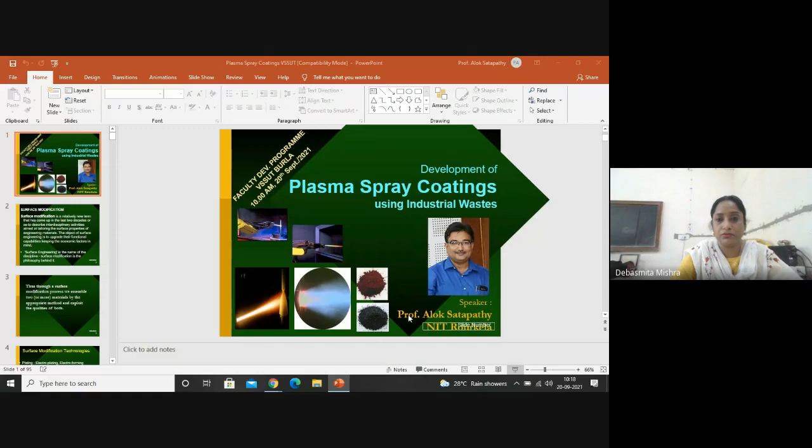Can you hear me? Yes, sir. And can you see the slide? Yes, sir, we can. Acha, just confirm the change of slide. Is it happening? Yes, sir. Okay. Okay, good morning once again. And thank you, Debasmita, for my introduction.

And today, as you have suggested, I will be speaking on plasma spray coatings, and more particularly development of plasma spray coatings using not conventional spray grade materials but using industrial wastes. And these plasma spray coatings are very close to my heart because I was working in this area for many years, and in the process we tried many industrial wastes to convert them from waste to wealth and for value added utilization of these materials into plasma spray coatings.

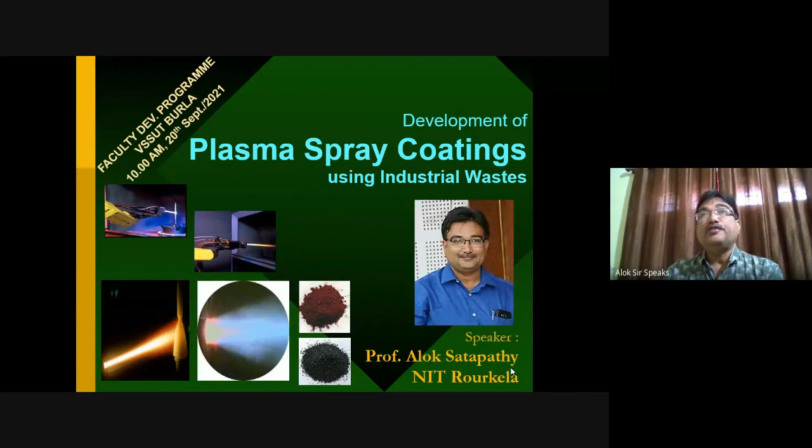So I will start this topic from a word called surface modification. As mechanical engineers, we know that whenever we have a component, the design of the component from the strength point of view is important, and its surface modification is also important from the failure point of view. And what is this surface modification? It is a relatively new term. Actually, it was not there 100 years back. It was there, but not as an organized stream of science and engineering.

It is, therefore, a relatively new term that has come up in the last 2 decades to describe the interdisciplinary activities aimed at tailoring the surface properties of engineering materials. Because in engineering materials, the bulk or core property requirements and the surface property requirements are different. For example, if you want a reflective surface, the surface should be reflective, not the core of the material. So the surface needs to be imparted with some kind of reflectivity by a technique called

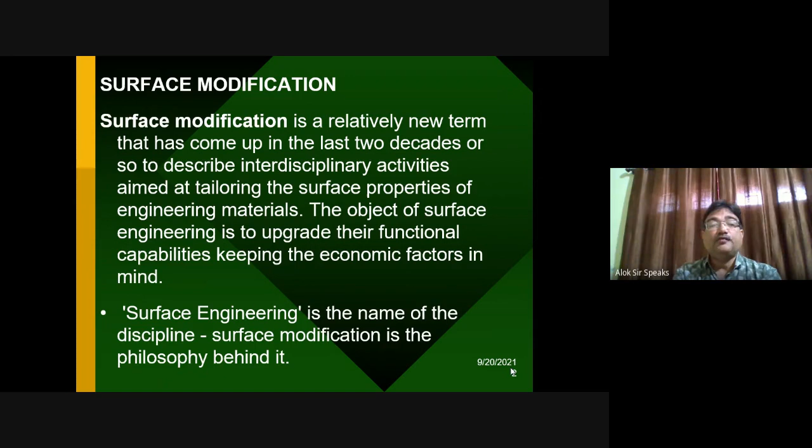surface modification. Now, while surface modification is the philosophy, surface engineering is the name of the discipline. And surface engineering has emerged as a very novel, emerging branch of engineering, where even master's programs and doctoral programs are being floated in many big institutes.

What exactly do we do? Through a surface modification process, we actually assemble 2 or more materials by the appropriate method and exploit the qualities of both: the quality of the core material for the strength or load bearing purpose, and the quality of the surface for combating the attacks of external or operating environments. Now there are different surface modification technologies like plating.

Plating is a very common technique. Electroplating and electroforming are under this plating category. Then you have diffusion processes, in which carburizing, nitriding, chromizing, boriding, all these processes are there, where actually you treat the surface in such a way that these elements get diffused to the surface, but they do not change the dimension of the component.

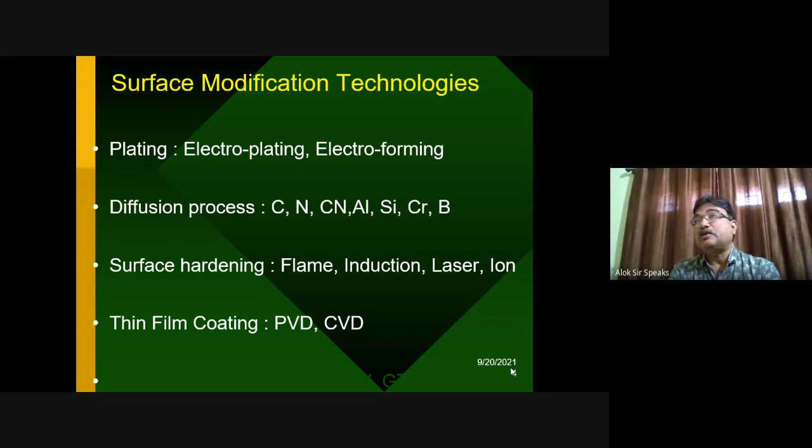But in overlay coatings, where another material is deposited on the original substrate, in that case the dimension does change. Then there are processes like surface hardening and thin film coating, like physical vapor deposition and chemical vapor deposition, under the modern surface modification technologies. Today we shall be discussing mostly coating.

What is a coating? Coating is actually a layer of a different material, which is formed naturally or synthetically or deposited artificially on the surface of an object made of another material. That means you can have a titanium nitride coating on mild steel. Titanium nitride is altogether a different material. Mild steel is another material which the machine is made up of. And on the mild steel surface, you give a layer of external material, that is titanium nitride, with an aim of either obtaining some technical benefits, or you can also use it for decorative purpose.

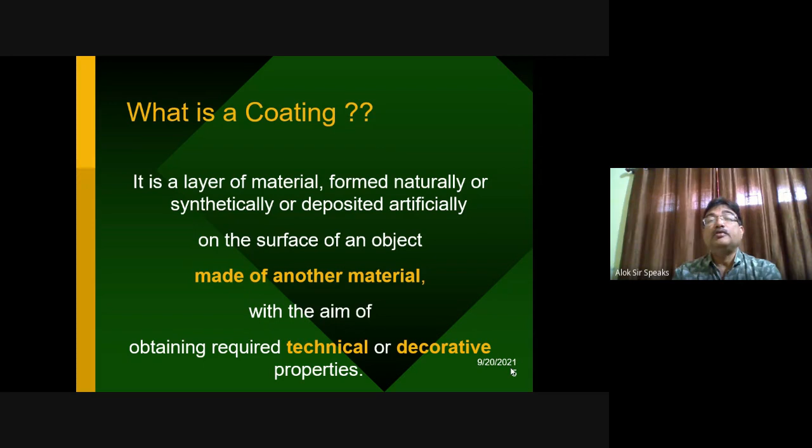So there are 2 members in this activity. One is the substrate, another one is the coating. The substrate is the coated object, and coating is the material that is coated. One is the base material on which coatings are to be deposited, and coating is the external material that is deposited on the base material. Like in composite we have a matrix and a reinforcement, similarly in coating activities we have a substrate and an external material called the coating, which is deposited on the substrate in order to impart or add some required properties onto the main base material.

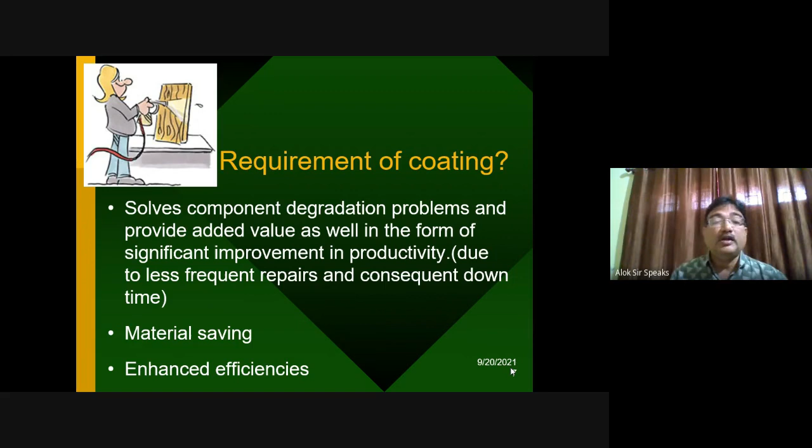So I've already told why the coatings are required. Coatings are required because they solve the component degradation problems. Why does the component degrade? Often because of environmental attacks, because of corrosion, because of coming in contact with dust particles, saline climate, water, or moisture in the air. The coating solves this degradation problem, and thereby coating also helps in material saving and enhances the working efficiency of the component. Once the component degradation is decelerated, naturally the efficiency will be enhanced.

There are different types of coatings. There are decorative coatings. There are some products where the aesthetic is of high importance. For example, ornaments, fancy objects, or a car. You will buy a car provided it looks nice. If your car is looking like a war tank, you will not buy it. So the outer look must be very good, and for that coatings with a decorative purpose are provided onto these products. That is also a subject of technical interest.

Then protective coatings. Protective coatings are technical coatings provided on the surface of any base material whose task is exclusively to protect the main component from the harmful effect of the environment, mainly the atmosphere and chemicals, as well as from mechanical hazards. Mechanical hazards means if there is wear and friction, high pressure, or high temperature in a workplace where the component is put to use, the surface may get degraded because of these external factors, and there you require a protective coating.

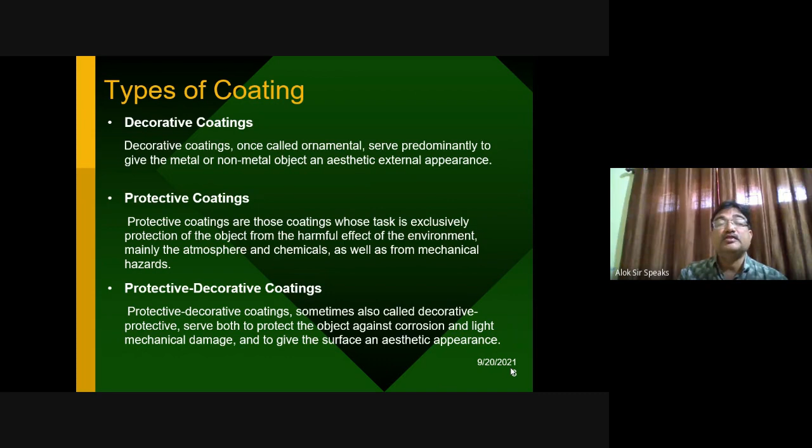For example, suppose you are using pipes in the deep sea. They come in contact with saline water, so very soon the surface will be degraded. So the appropriate coating material must be deposited on these pipes and tubes so that their longevity is enhanced and their performance is bettered. So there can be decorative coatings, protective coatings, and also protective decorative coatings, where the purpose is not only to protect from mechanical and environmental hazards, but also to give a good appearance, so that its market value is increased.

The protective coating is also a technical coating. Technical coatings are coatings provided on a base material with an intention to get some technical benefit. So you can have coatings that improve the tribological properties, that means they arrest the damages due to wear and tear and friction. There are coatings which enhance electrical properties. Sometimes you can coat a material with an electrically conductive or electrically insulative material so that the surface becomes conductive or insulative accordingly.

Then coatings which enhance the solderability, the ability to get soldered. The coatings that protect the material against diffusion. The coatings that enhance some target thermophysical properties. Then coatings which enhance the optical properties. Suppose you want a coating to absorb the light or absorb heat, then in that case you can paint it black, so that a black coating is provided on the surface.

Sometimes you want reflectivity on the material, so in that case you can apply a reflective coating so that you can get a benefit out of that. For example, when you are driving on a highway, you can see the road markers. The road markers are reflective materials, so that even while driving, you can see the border of the road or the divider from a distance. So there the reflectivity plays a very important role.

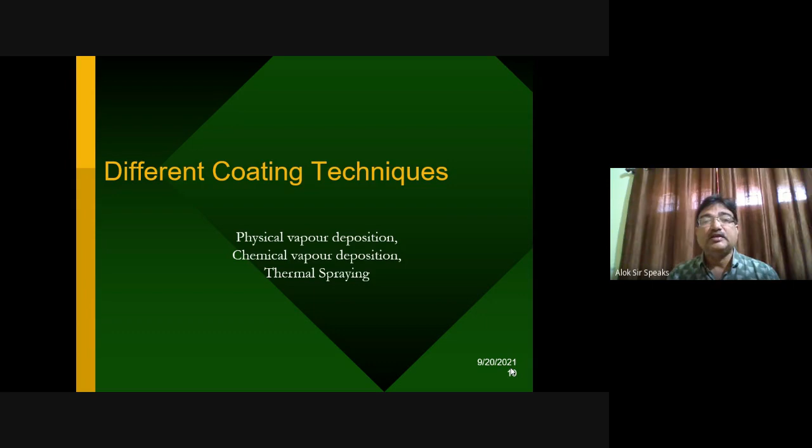Today our discussion will be confined to a particular type of thermal spraying technique. So we must understand what thermal spraying in general is, and then we can go for the specific one, that is plasma spraying. Now, what is thermal spraying? Thermal spraying is an umbrella. There is nothing like a single thermal spraying technique. It is actually a category of spraying techniques under which there are many processes.

So it is a generic category of material processing techniques that apply consumables, because the consumables are the ones which are to be deposited, spray coated on the base material. This consumable must be in the form of finely divided molten or semi-molten droplets to produce a coating onto the substrate kept in front of the impinging jet.

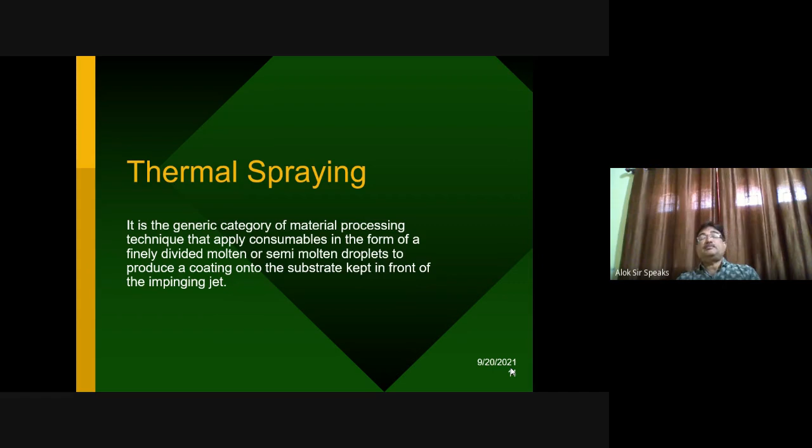So this sentence indicates that thermal spraying covers a host of techniques that involve use of consumables, or the coating materials, and they are to be melted or semi-melted. That means you require a heat source for that, and then you have to have an impinging jet, which will carry these powders to the target surface.

Now before we see what actually is thermal spraying, let us have a visit to the various applications that use thermal spraying, and you'll be surprised and amazed to see that there is no industry untouched by the use of thermal sprayed or coated products. So the applications are repair or build-up of worn or damaged surfaces.

Suppose a surface is damaged, then you can reclaim it, or make the damage up by the thermal spray coating technique. You can undercoat for paint, you can do it for electrical conductance, you can do this coating for improving wear resistance and corrosion resistance. You can make this coating to make products resistant in high temperature situations, and you can also make them insulative at the surface, as I told before, in case the working requirement demands it.

As I told you, thermal spraying is not a single technique, it is a common name for a vast gallery of techniques for coating deposition. In this technique, the coating is produced by a process in which molten or softened particles are applied by impact onto a substrate, and that impact is accomplished by an impinging jet.

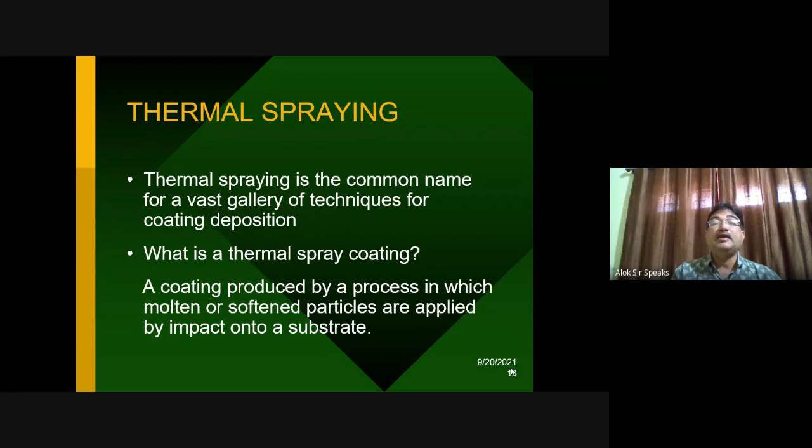We must understand at this place what are the fundamentals of this thermal spraying process, how actually it occurs, and what are the various stages. And it is very simple to understand.

It's very simple. It is just like if you take in your hand a ball made of mud, and if you throw it to a wall, then what will happen? So if the mud is a wet mud ball, then in that case what will happen? A part of that may stick to the wall, or the whole of it may stick to the wall, or the entire ball may fall onto the ground after hitting the wall, and even after that it will form an impression on the wall. So it will form an impression on the wall that one can make out that something has been thrown to the wall.

Similarly, exactly the same way, the thermal spraying technique is carried out. The different steps are as follows. The coating material, I mean, whatever you want to coat, say, as I gave you the example of mild steel and titanium nitride. Titanium nitride is the coating material, mild steel is the target material or base material on which the titanium nitride coatings are to be deposited. So the coating material is molten by the heat source and propelled towards the surface that is being coated, where they impact, flatten, and solidify.

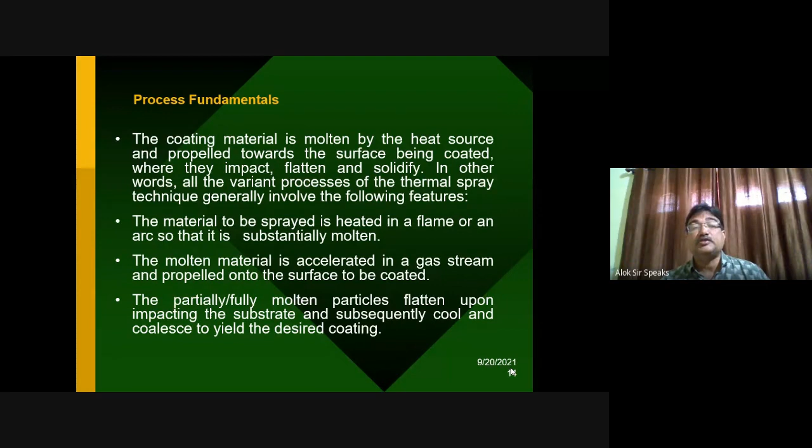This molten material is accelerated in a gas stream, so you require a gas, precisely a high pressure gas stream, which will carry this molten particle in a direction where you are placing the target object, and that should be propelled onto the surface which is to be coated. And these partially or fully molten particles flatten, as I was giving you the example of this ball made up of mud hitting the wall. So these partially or fully molten particles flatten upon impacting the substrate and subsequently cool and coalesce to yield the desired coating.

You can look at this diagram. So these are the process fundamentals. First, you can have the coating material in the form of a rod or a wire or powder, and that powder will be subjected to supply of certain amount of heat, and that amount of heat must be capable of not only taking it to the melting point, but also should be providing the latent heat of fusion, so that the particles melt and they get into a molten state, and then they come in contact with a high pressure jet, made up of compressed gas, high pressure gas, or stream, and then it will be propelled towards the surface.

This is the surface. You can see the hatched line is the surface or the target surface on which coatings are deposited, and the formation of splats are there, and these splats do get formed layer after layer on the substrate surface, and after some time you will see that there is a multi-layer coating formation. You can see the developments precisely in this magnified diagram. The material coming to the molten state, getting accelerated and propelled towards the target surface, hits the surface, forms a splat, and then a number of splats one after another is formed, and so after some time a coating of reasonable thickness is formed by these splats.

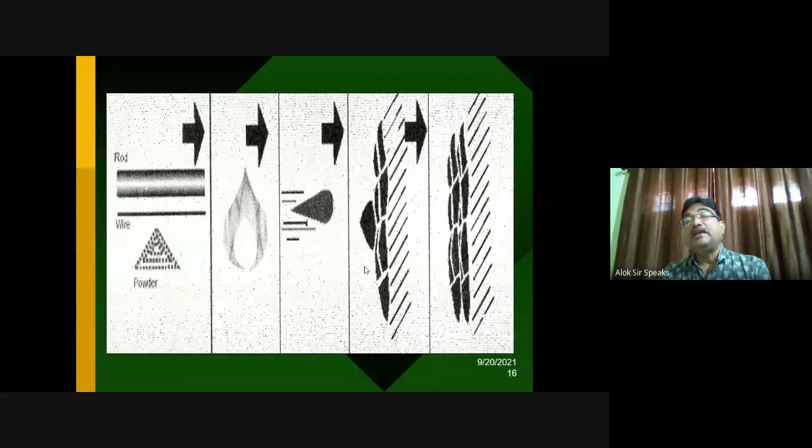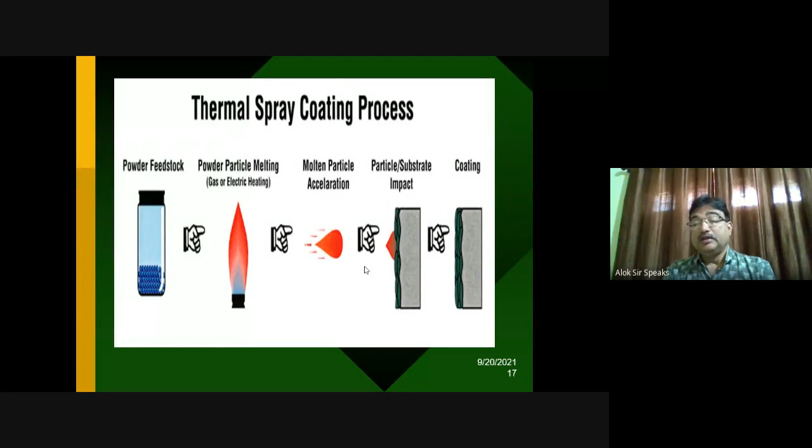The same thing: the feedstock powder particle melting, molten particle acceleration, then particle impact, and then finally you have the full coating body deposited on the material body, base material. These are schematics. So today I'll be showing you a lot of photographs which will give you an insight and idea about the coating formation.

And we know why I'm telling spherical particles, because you know that when anything is melted, when it becomes a liquid, then it will take the spherical shape due to a physical property called surface tension. All of us know it from physics.

And then, as I told you, the melting of these consumables or the coating materials may be accomplished in a number of ways. The consumables can be introduced into the heat source either in a wire form or in a rod form or in a powder form. And what can be sprayed? These consumables can be metallic materials, ceramic materials, or even polymeric substances.

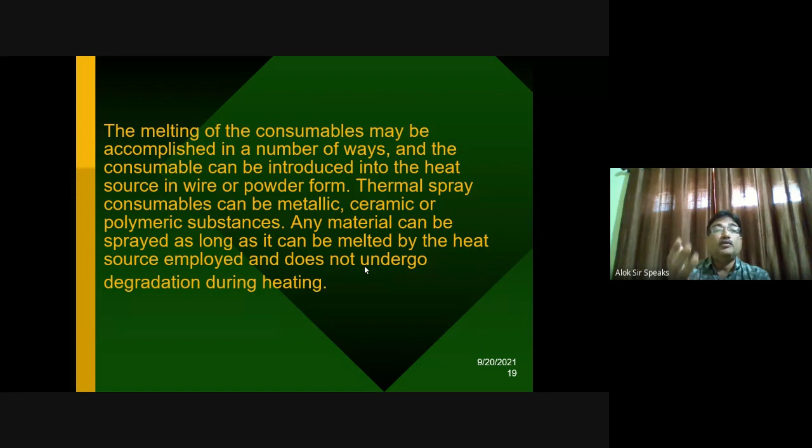So any material can be sprayed as long as it can be melted by the heat source employed and does not undergo degradation during heating. So it should not undergo a large scale degradation during heating, and it can be melted with the absorption of heat, then it can be sprayed. So as I told you, look at the versatility of the process. It can be metallic material, it can be ceramic material, and it can be polymeric substances. Today we will be discussing mostly about the ceramic coating formation.

And there are two basic ways of generating heat. How do you generate heat? Okay, a heat source is required, agreed, but where does the heat come from? And depending on where the heat comes from, you have different types of thermal spray techniques. Like today we'll discuss the plasma spray technique. It is because the heat source is plasma. Plasma provides the required heat for melting of the material. That's why it's called plasma spraying.

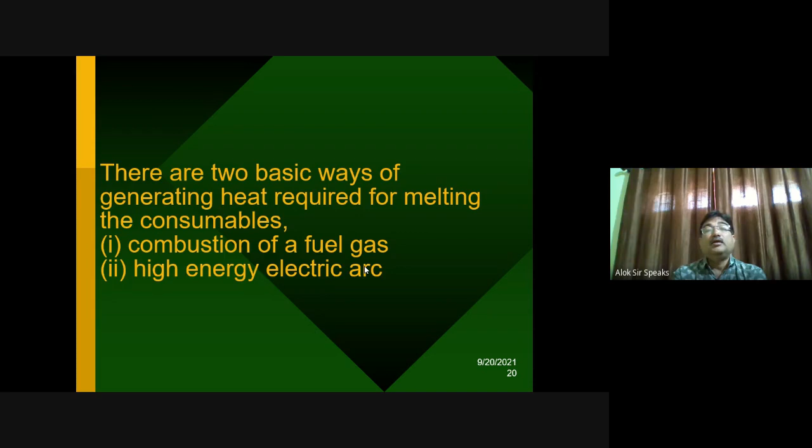Otherwise, it is a thermal spraying technique. If it is coming from an arc, it is arc spraying. If it's coming from a flame, it is flame spraying, like that. So the heat source can be obtained by combustion of a fuel gas or by a high energy electric arc.

We are coming to the process, but as I assured you a few slides back, we must have a look at the possible uses or applications of thermal spray coatings, and you can see the list of industries that employ thermal spray coatings. And look at this host of industries, and you will find there is no industry untouched. Even if you name some other industry other than this, that also will be using thermal spray coating.

So you have aerospace, construction industries, electronics industries, defense, automotive, biomedical sectors, dredging and food processing, marine and mining, petrochemicals, steel plants, textile and power plants, pulp and paper, oil and gas units. So everywhere you will find rampant use of thermal spray coatings.

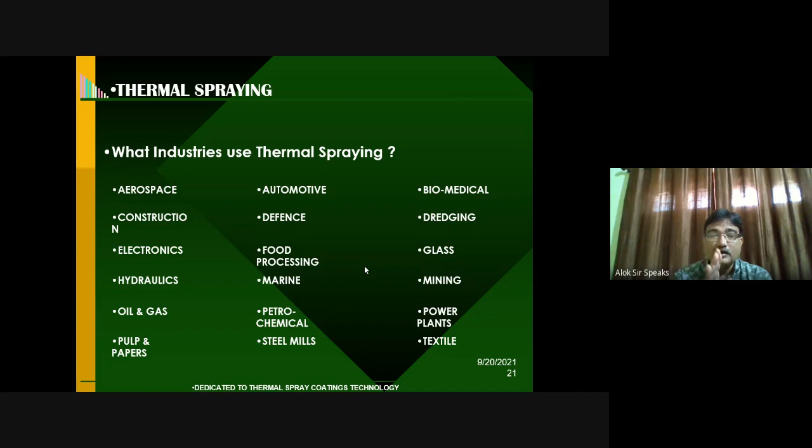So thermal spray coating, the technique may not be a novel technique, but it is not a novel material as such, because the conventional thermal spray coating materials are being used everywhere universally. What is novel about the thermal spray technique is that you have to explore new materials, what can be coated, then that will give some novelty to your work.

Now look at the aerospace industries, and there you use coated components because of their strong corrosion resistance, high temperature resistance, and you normally use thick coatings. They require sufficient coating adhesion, I'll tell what coating adhesion is, then abrasion resistance, etc.

And you can see on the right bottom, these are the specific parts. So instead of just telling that it is used in aerospace industries, we can also list the specific components, I mean, pinpoint the applications of these thermal spray coatings in the aerospace industries. So look at the turbine blades, the piping system, okay, and the journals, the bearings, and in all of them thermal spray coatings are being used.

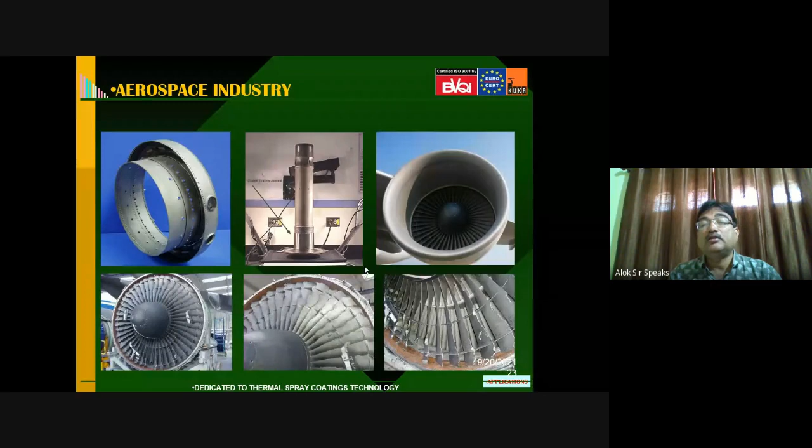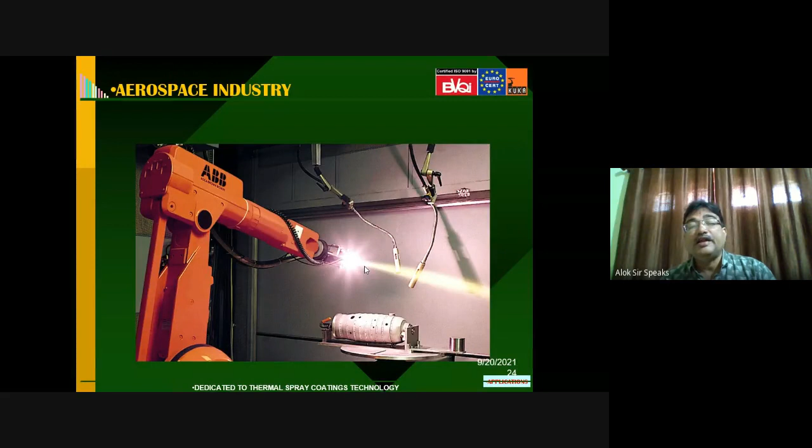This is how a coating process is accomplished. If possible, I will show a video where you will get an idea about how the coating takes place. And this is also part of an aerospace turbine unit, the opened one. So here also the blades are coated with thermal spray coating.

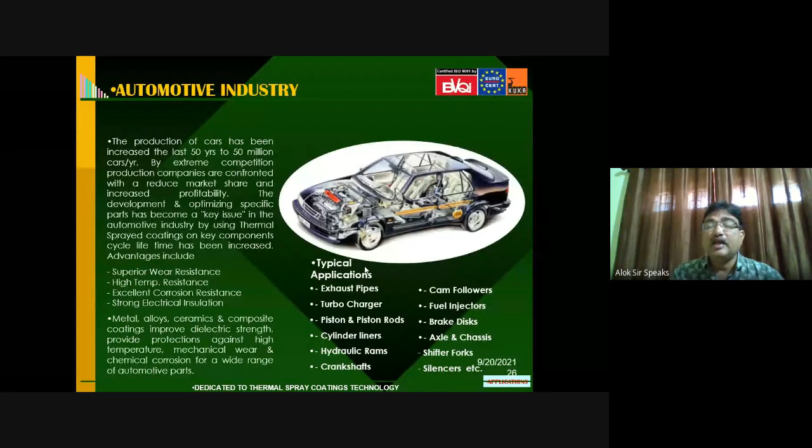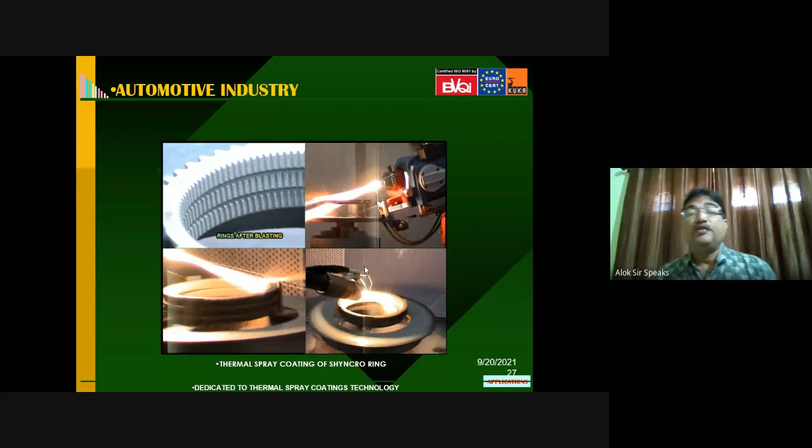In the automotive industries, there are many parts: exhaust pipes, turbochargers, piston rods, brake discs, axles, shift forks, silencers, crankshafts, hydraulic rams. Everywhere thermal spray coatings are being used. So the list is very long, and just see the photographs of the different parts of an automotive, how they are coated, and these are pictures picked up from industries where different parts like the cylinders, the silencer system, the exhaust system, all these things are being coated both internally and externally.

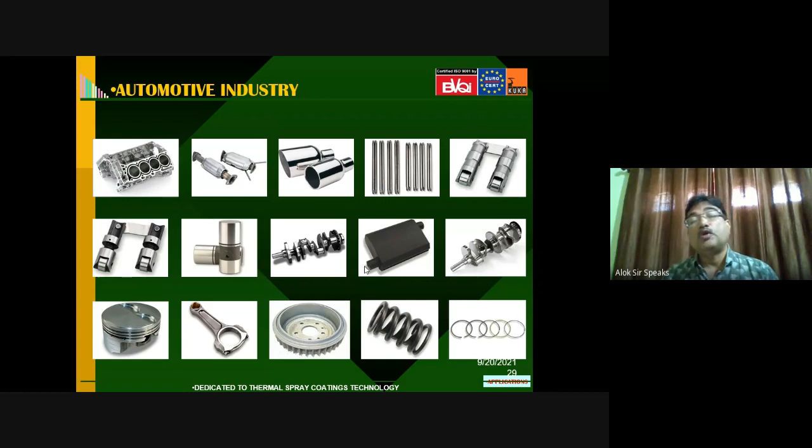These are the different parts, the coated parts or finished products. Of course, the coating material that is coated on these substrates or components will be different depending on the demand of the application. Coming to the biomedical industry, these coatings do have a lot of applications, particularly in artificial limbs and bone and hip joint replacements.

But here, apart from strength and durability, the additional and most important required property is biocompatibility, because it is to be implanted inside the human body. So it has to be compatible with the other parts of the body, the blood and the flesh and nerve system. So the biocompatibility needs to be checked.

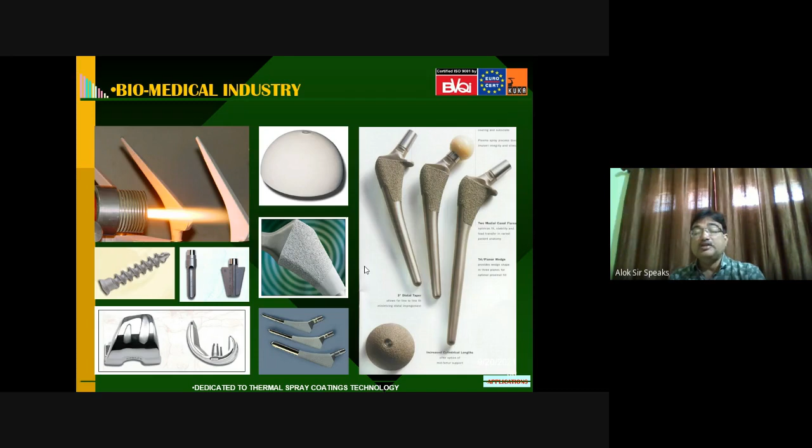Civil and construction industries, no need to mention the applications. Anywhere and everywhere you see, you will find thermal spray coated samples. Power plant industries, starting from turbines, cyclones, boiler tubes, shafts, rotors, turbine rods, pumps, everywhere you will get a signature of this thermal spray coating.

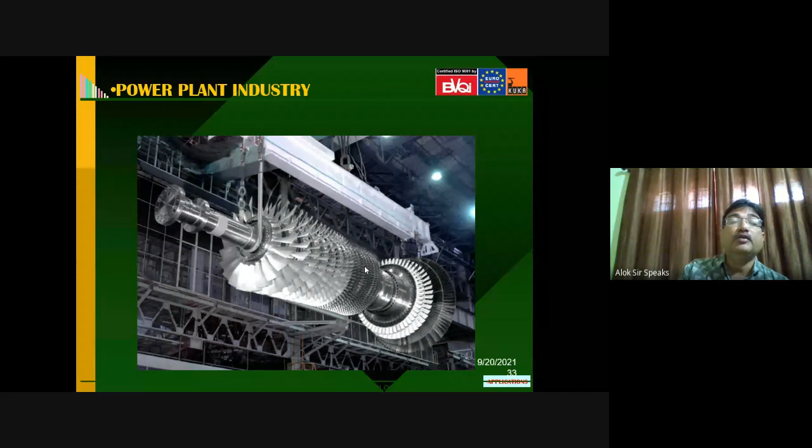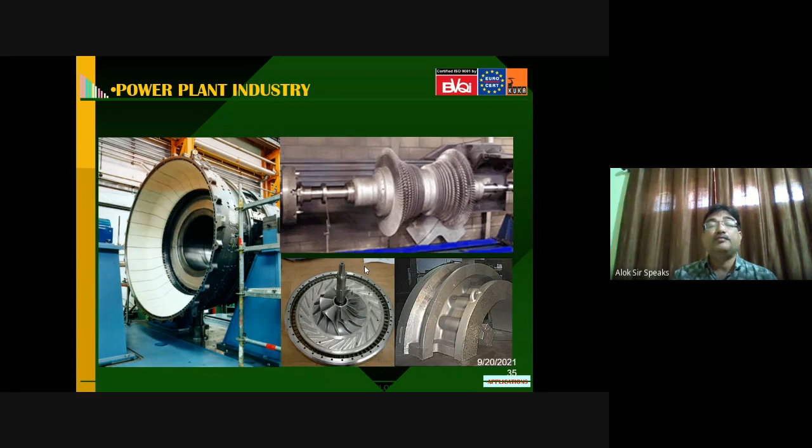Now, as I told, the power plant where you have this rotor system, turbine system, there the use of thermal spray coatings is very large. These are the different parts, finished products after being coated, and you can see the coated surface, and you can see that these surfaces possess properties that are different from the properties of the material that they are made up of. That's the difference, and that's the beauty of surface engineering.

The coated material or the coated surface will exhibit fairly different properties compared to the intrinsic properties of the base material. And these properties of the outer surface are the required properties for the component, because it is the surface which will be coming in contact with the direct environment, the immediate environment. So we saw a gallery of thermal spray applications.

Let us discuss what are the benefits of this thermal spray. Benefits: this coating can be adapted to specific criteria. A comprehensive choice of coating materials can be made. Coatings can be post-treated after being coated. Thick coatings can be applied at high deposition rates. Parts can be rebuilt quickly and at low cost, usually at a fraction of the price of the replacement.

That means if you are going to reclaim a part and make up for the damage of the part due to wear and tear using thermal spray, then that will be a costly activity, no doubt, but that cost will be still less than the cost of replacement. So components with a coating will have longer lifetime, it is obvious. Their durability and the lifespan will be more.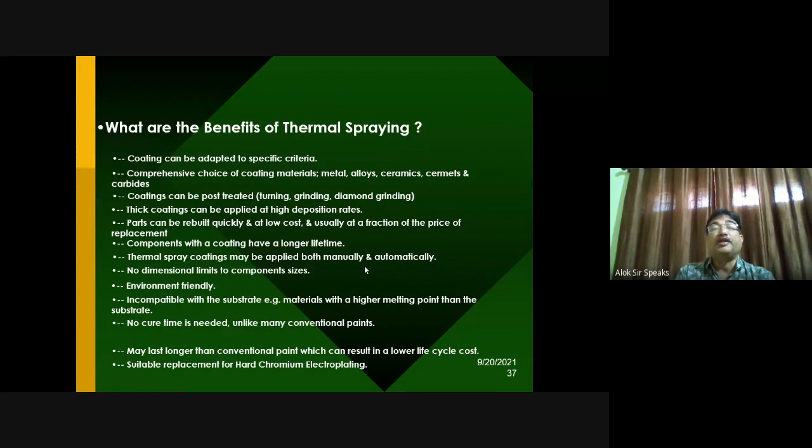So once you have identified a coating material which is cheaper than chromium, then this activity will be less costly than to have a replacement for hard chromium electroplating. So these are good things about thermal spray technique. There are limitations though, but this thermal spray process, as I told you, till now we have not gone to plasma. We are only discussing thermal spray in general.

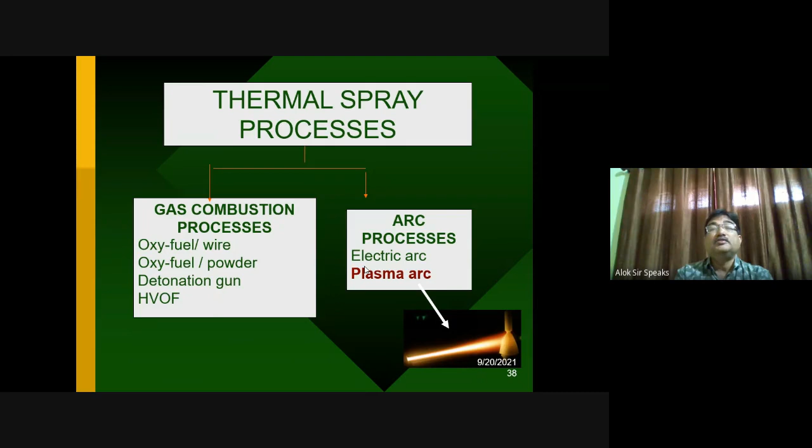I think in the next session, Dr. Mantri will highlight more on this, because he'll be talking about thermal barrier coatings. So there, I think he will cover all these things as well.

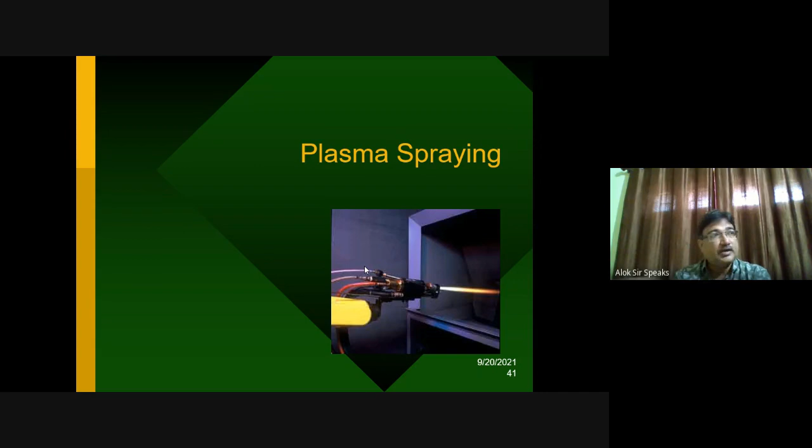So let us come down to plasma spraying. What is plasma spraying? Plasma spraying is a thermal spraying technique which uses plasma as the source for heat in order to melt the coating material. Otherwise, the rest of the process fundamentals, everything is the same as for thermal spraying, because after all, it is a thermal spraying technique.

Now, what is plasma? Plasma, as we know, is the fourth state of matter, and is distinct from solid, liquid, and gaseous state. When you heat a solid, you get liquid. When you heat a liquid, you get gaseous state. Similarly, when you heat a gas, then what happens? The gas will get dissociated from molecules to atoms, and get ionized from atoms to ions, and then you get a cloud of positively and negatively charged particles, the ions, the molecules, and the atoms.

And that cloud, which is quasi-neutral in nature, although it contains charged species, but as a whole it is quasi-neutral, and that cloud is called plasma. And it is an electrically conducting medium, and at the same time, though it is an ionized state of gas, it is not called or categorized as the gaseous state, because plasma does not follow the gas law. Conventional gas law, the Charles law, Boyle's law, universal law, etc., are not followed by plasma.

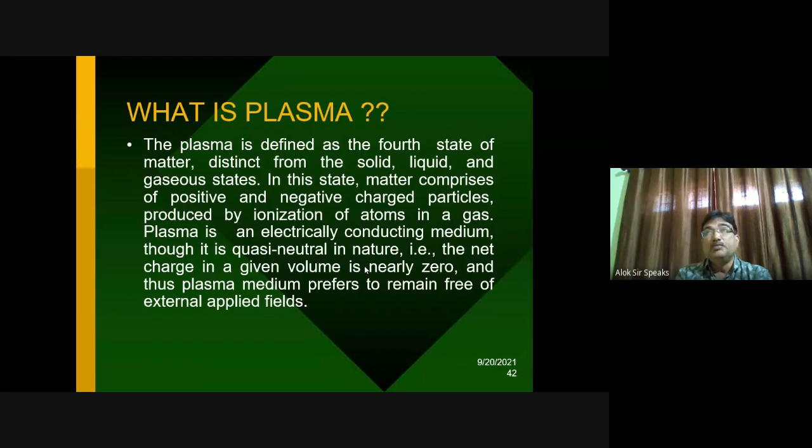Plasma behaves differently, and it is considered not as a gas, but as a state beyond the gaseous state, that is the fourth state of matter. This is what I was telling. Solid to liquid, liquid to gas, and then further application of it will give rise to the generation of plasma. And it is the fourth state of matter. Plasma we can see in the lightning, on the sun's surface, and within an electric bulb the plasma cloud can be visualized.

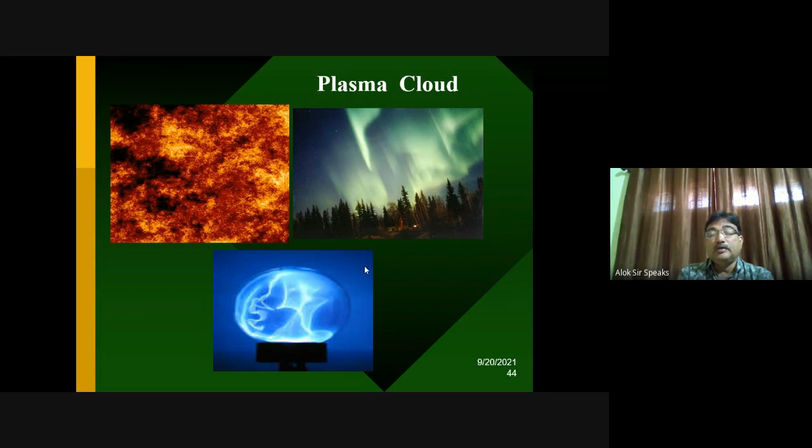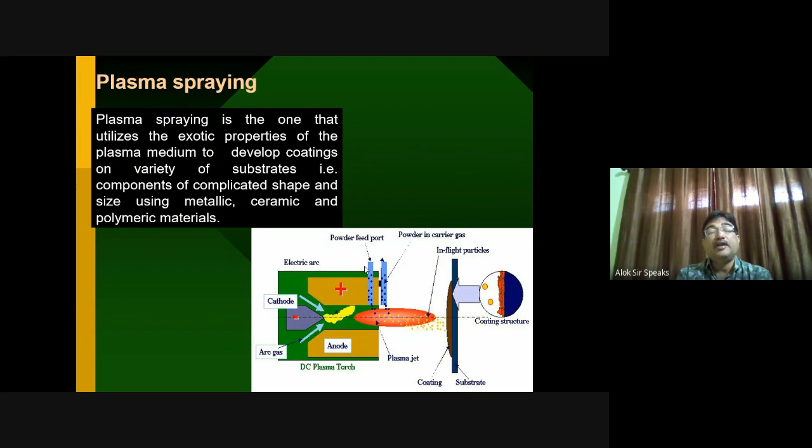This plasma spraying is one thermal spraying technique, one typical and very widely used thermal spraying technique that utilizes the exotic properties of the plasma medium. Plasma medium has got its own beautiful properties, and very conducive for industrial applications, and that is utilized to develop coatings on a variety of substrates of complicated shape and size, and it can use also a wide range of materials ranging from metallic to polymeric ones.

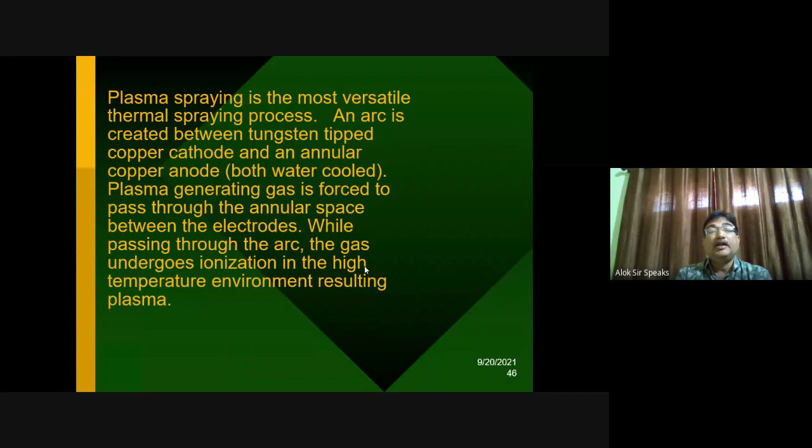So I repeat that plasma spraying is the most versatile thermal spraying process. I have already told before. And what happens here is that an arc is created between the tungsten tipped copper cathode and an annular copper anode, and both are water cooled, and this plasma generating gas is forced to pass through the annular space between the electrodes. While passing through this arc, the gas undergoes ionization. Because of the high heat, high temperature, it gets ionized, and that results in formation of plasma.

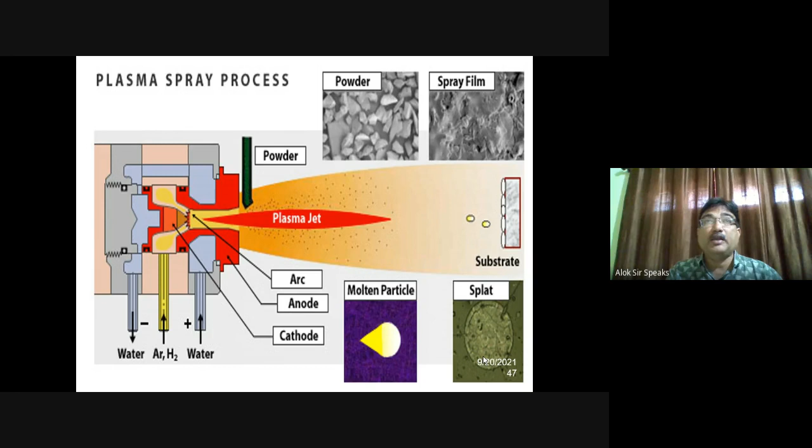So one particle will form one splat, and the particles are continuously hitting the target. So therefore, there will be continuous formation of splats, and all these splats layer by layer together will form the coating body ultimately. So this is again the description of the same thing that I have spelled out, and the different steps.

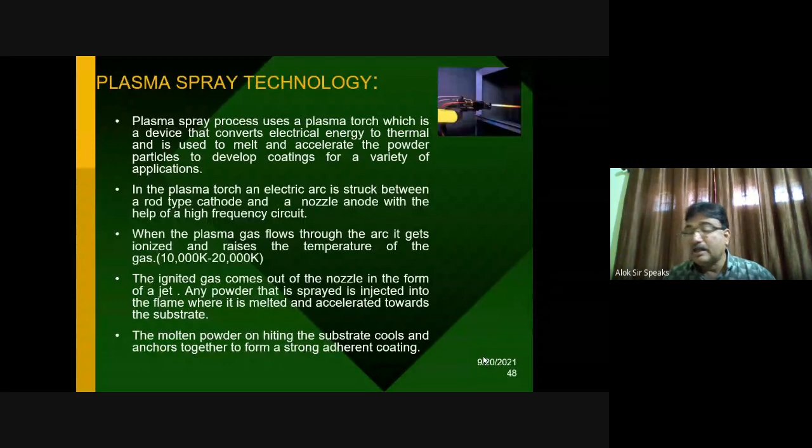And here I would like to tell that the maximum temperature that can be achieved is very large. It is beyond 10,000 K, and sometimes for some gases it also reaches 20,000 K at very high torch input power. That means when the current and voltage combination is made high, then the power input to the plasma torch becomes even higher, and then you can reach a temperature as high as 20,000 K. And the beauty is that at this temperature, any material can be melted, and that is the advantage of plasma spray process.

So, if you list the plasma spray process advantages, then any powder which melts without sublimation. Okay, the condition is that it must be melting, but at the same time should not sublimate. Sublimation is the process of going directly to the vapor phase, bypassing the liquid phase. So that should not happen. It should only melt. So powder which melts without sublimation can be coated.

The substrate temperature, although the flame temperature is as high as 10,000 K, will not increase, because the flame does not come in physical contact with the substrate. So it remains at a distance called the TBD, torch to base distance, and the substrate temperature can at best go a little beyond the atmospheric temperature, up to 50 degrees centigrade, because the environment gets heated up. There is no restriction on the size and shape of the job.

That's the versatility of this process. And the coating process is fast. That's a very unique advantage or merit of this plasma spray coating process, because the coating process is very fast.

In seconds or in minutes you can finish coating of even 1 square meter of a component, and the thickness can go from few tens of microns to millimeters. That means this technique is suitable for thick coatings. In the coating world, any coating which has got thickness over say 50 micron or 100 micron are called thick coatings, and below 10 micron are called thin coatings. So for thick coatings, this process is applicable. This process is not applicable for thin coating requirement.

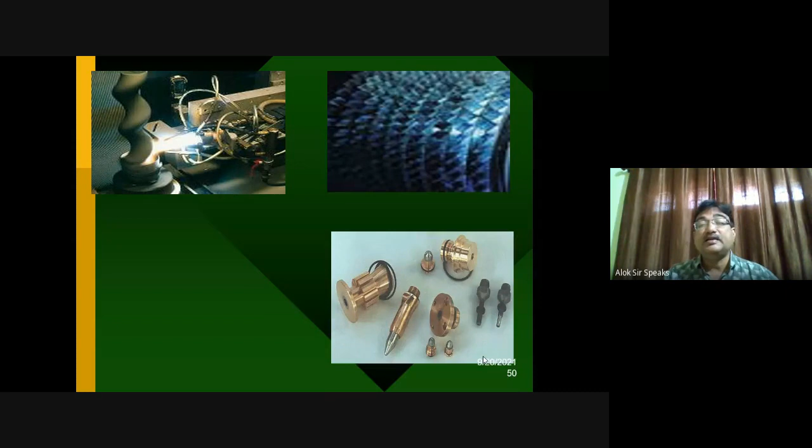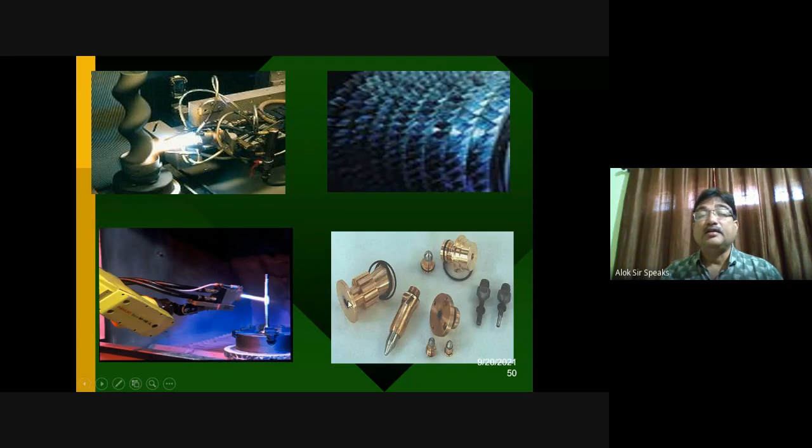You can see that complicated shapes and intricate shape and size of components can also be put to use for plasma spraying activity. So that is the versatility of this process. Even a curved shape like this one, or internal shapes like inside of a hollow tube, all these things can be done with plasma spray.

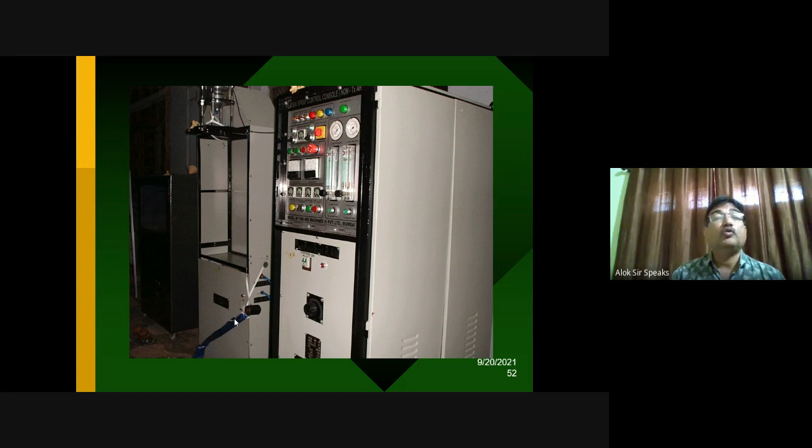This is a typical plasma spray setup where you have the different units like powder feeder, the control console, and the plasma gun, then the cathode anode combination, the water cooling system, and gas cylinders from which plasmagen gas is supplied. All these things you can have. This is a picture of a plasma spray coating facility which was there at NIT Rourkela. Right now it is not there, and we are looking for a more advanced and automated system now.

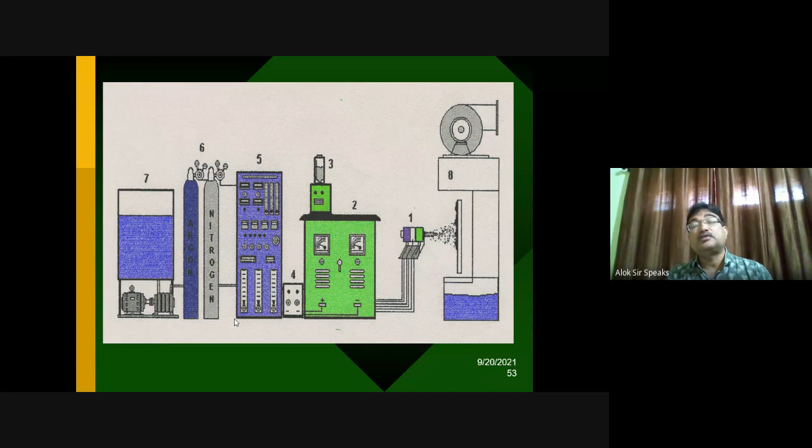This is the schematic of the same setup, where you have the gas cylinders, the control console, the electrical power system, then you have the plasma torch, then you have external powder feeder from which the powder is fed to the flame. Schematic diagram of a complete atmospheric plasma spray setup is this. Why am I calling it atmospheric plasma? Because this activity takes place under atmospheric conditions, not in a controlled condition. If it is conducted in a controlled condition, then we say it is controlled atmosphere plasma.

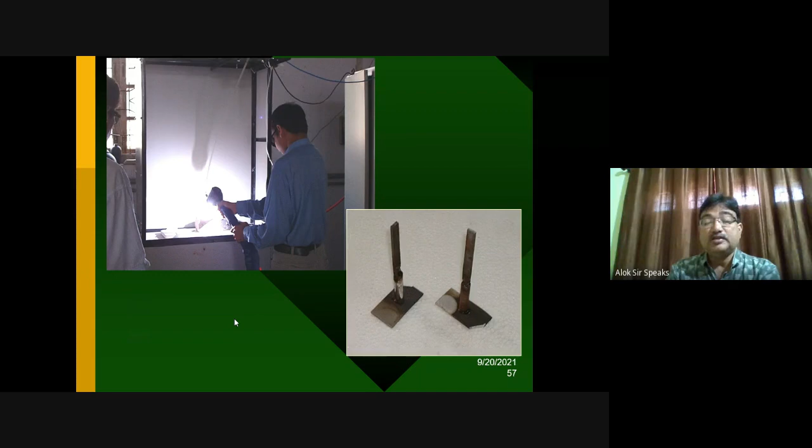Then this is an old picture of mine at BARC, where the plasma spray coating was done by me manually. Now there are automated systems where you can control it from outside the chamber, and automatically it will do. But here manually you can control the number of passes, the thickness, and also vary the spray distances at your end. This picture I have already shown you, and these are some of our students. They did coating. Even Dr. Mantry, who will be speaking in the next session, prepared his coated samples here at NIT Rourkela in this facility long back in 2004 or 5.

And that was working well, although it is an indigenous setup and a manual system. It is less expensive. But the control in a manual system depends very much on the skill of the person who is coating it. So it is a skill based technique if you are doing it manually. If it is an automated system, you can program the whole thing: the number of passes, the powder feed rate, the temperature, and then accordingly it will operate.

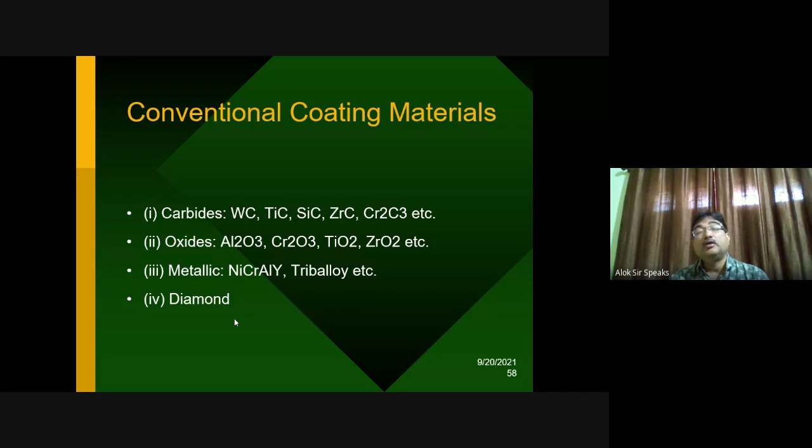Once you conduct a plasma spray activity with this conventional material, normally you have to go for characterization of the coating. The coating characterization involves evaluation of certain essential properties like coating adhesion strength. That means with what force it adheres to the substrate, what is the intensity of mechanical interlocking between the coating material and the substrate. An idea about that is obtained from the evaluation of coating adhesion strength.

Then measurement of porosity is also important, and it is done with an image analysis technique, and that gives you an idea about what is the void fraction of volume that lies within the splats, which is detrimental to the strength of the composite.

It's not desirable in many applications, but the measurement of that void fraction is essential, because that only will tell you what is the quality of the coating, what kind of coating it is. It's a good coating or a bad coating.

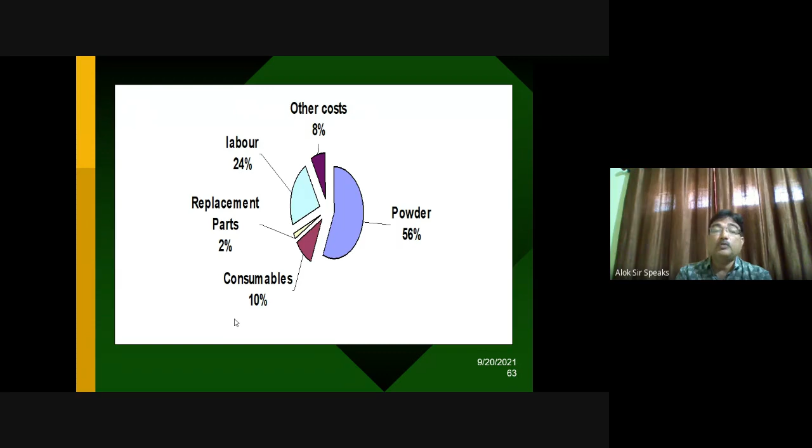Because gradually we are coming to industrial waste, I'm telling you that in a coating activity there are different components of cost expenses. But the major component is the cost of the powder. So in a coating activity, 50 to 56% cost goes to the cost of the powder. That's why the coating becomes an expensive activity.

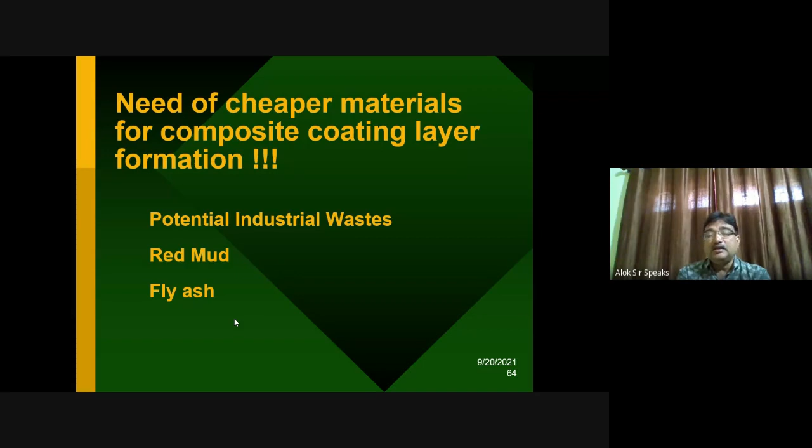Now if you want to make it cheaper, less expensive and affordable by everyone, then you have to focus on that component which is costing more, that is the powder. So the spray grade powders or the conventional powders which I had earlier listed out are expensive powders, and in place of them, if one can think of low grade minerals or industry wastes or construction waste which can have coating potential, then drastically the cost of the coating activity will decrease.

With this in mind, we started our research with some industrial wastes, and we got very promising results, and that research is still going on, and we are exploring new industrial wastes. Recently we are successful in developing the marble dust coating on metallic substrates, not using plasma spray. We are using another technique called high velocity oxyfuel, and my students are involved there, and with the technical guidance from Dr. Sisir Mantri, we are carrying out that coating operation, and we have been successful to a large extent.

So if you look at this combination of materials, you'll find that except the alumina titania, all the other combinations do contain some industrial waste. Either both of them are industrial waste, or at least one of them is. So these coatings have already been developed by our group, and I will share my experience with at least one or two such coatings. First one is red mud fly ash coating.

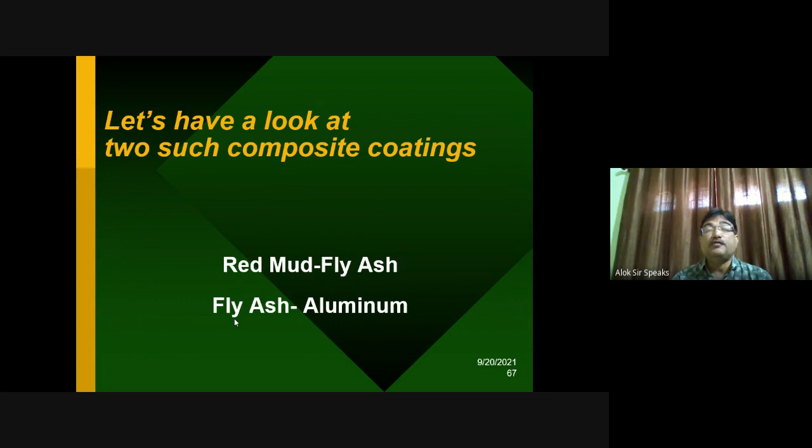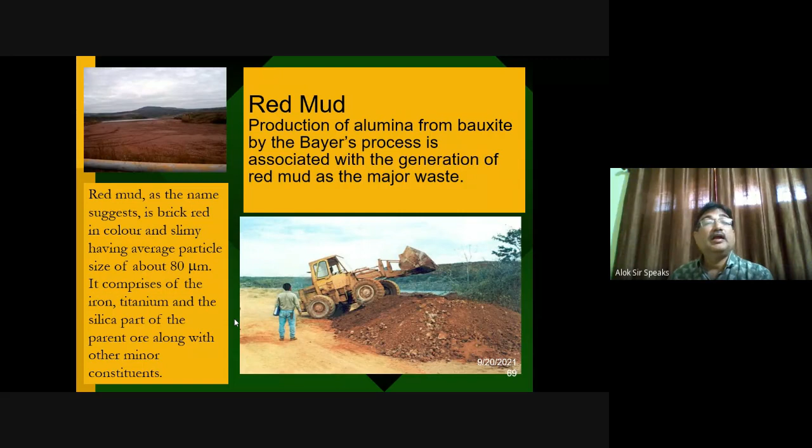So red mud, as you know, is a waste that is generated in the alumina plants, where alumina is produced from bauxite through Bayer's process. And in Odisha, a big company is there, Nalco, and they have an alumina plant at Damanjodi. So we collected some red mud from Damanjodi. You can see the picture here, and this is looking red because of its high content of iron oxide,

and this is a huge waste, and the disposal of this waste is a big problem for the alumina industries throughout the globe. Although Bayer's process is 150 years old, still the disposal and utilization of red mud remains a challenge to engineers and the scientific community throughout the globe. Either this red mud is dumped into the sea, provided the sea is nearby, or it is simply dumped into open space. When it is dumped into open space, being carcinogenic, it creates health hazards in the immediate vicinity. The inhabitants who are staying nearby are affected.

Their health is getting affected, and it is a known pollutant. But if it can be used for some value-added applications like composite making or coating making, then maybe a part of that can be properly utilized in order to make some value-added product.

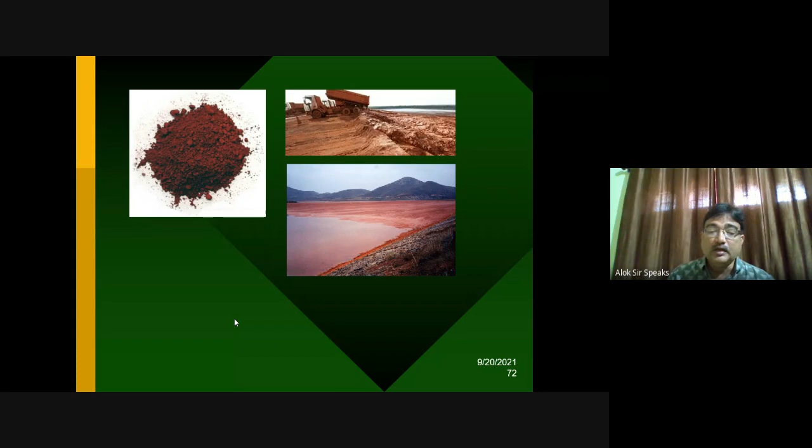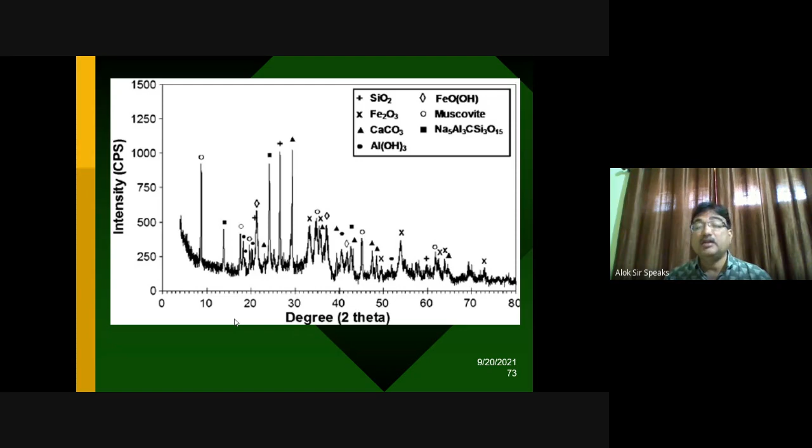Keeping this in mind, we tried this red mud coating, and we went for an X-ray diffraction test of the red mud. We found different constituents like silica, iron oxide, calcium carbonate, and a little bit of aluminum hydroxide as well. Then we sieved it to get a particle size in a range of say 80 to 100 micron, around that range.

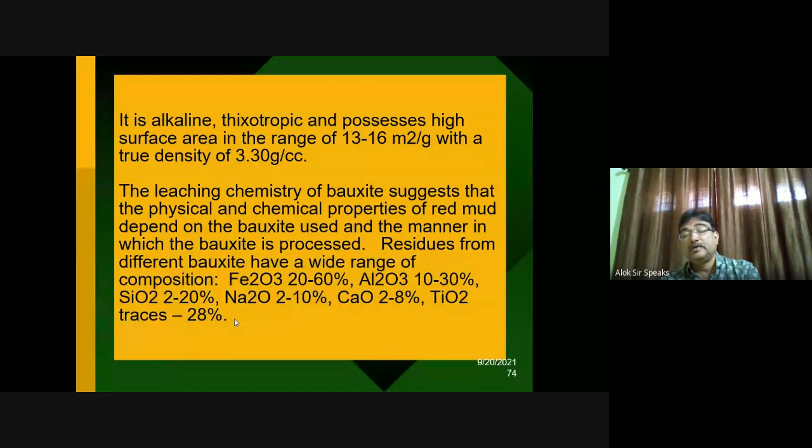And we went for a chemical analysis that suggests that it contains a lot of iron oxide, aluminum oxide, sodium oxide, calcium oxide, and titanium, silicon oxide also. And its density is 3.3 gram per cc.

The constituents of this red mud, the silicon oxide, the aluminum oxide, iron oxide, are individually all good and tested coating materials. So we thought, why not use the mixture of these materials as a coating material, and we tried and we succeeded. And we not only succeeded with red mud coating alone, we also mixed red mud and fly ash in definite proportions.

And fly ash, as you know, is another industrial waste, and it is needless to mention that fly ash is generated in power plants and causes a lot of health hazards. Of course, fly ash is being used for brick making and pit filling, but in spite of that, in the power plant areas, you will find tons of fly ash getting accumulated in open fields. So fly ash is also mixed with red mud in different proportions, and the coating was done.

So you can see that we tried with red mud 100%, red mud and fly ash in 9:1 ratio, red mud and fly ash in 7:3 and 5:5 ratio. Then we mixed a little bit of carbon powder with red mud, because carbon is a reducing agent. And then red mud is also mixed with 5% of spray grade aluminum, just to see how it affects the different coating properties and coating quality.

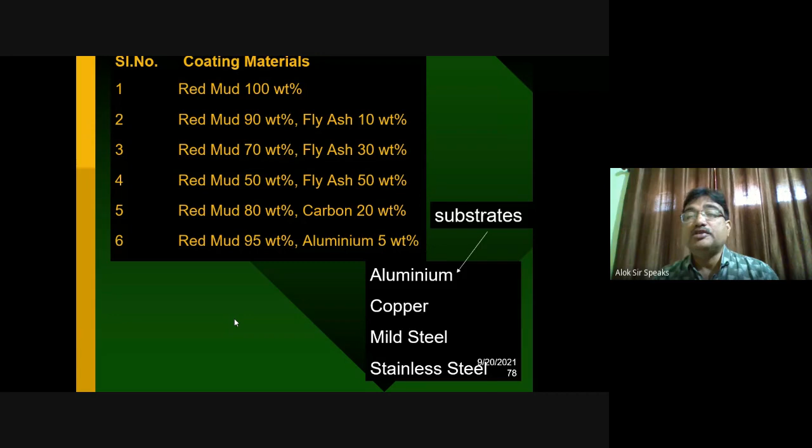And we tried with different substrates, because the coatability of a particular coating material cannot be the same on all the metals or all the surfaces, because the mechanical anchoring depends on the nature of the substrate as well as the nature of the coating material. So in order to see that variation, we tried with aluminum, copper, mild steel, and stainless steel surfaces, and then we coated these using a plasma spraying technique.

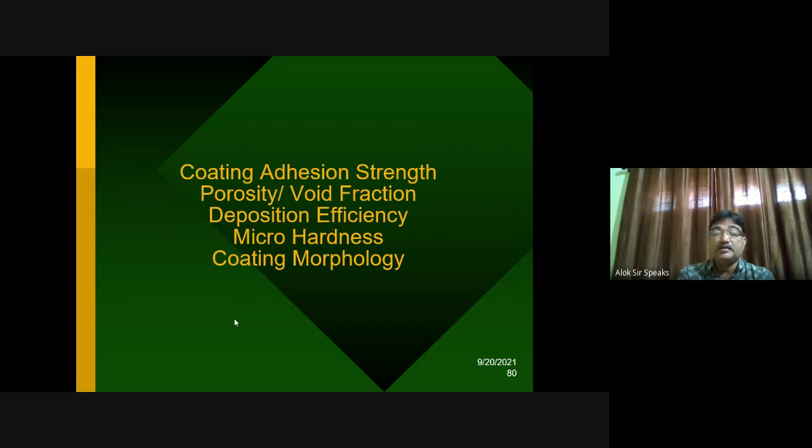After these coatings are formed, the characterization was done. The essential characterizations carried out are coating adhesion strength, measurement of the porosity and void fraction, the deposition efficiency, micro hardness, and of course the coating morphology was also observed under a scanning electron microscope.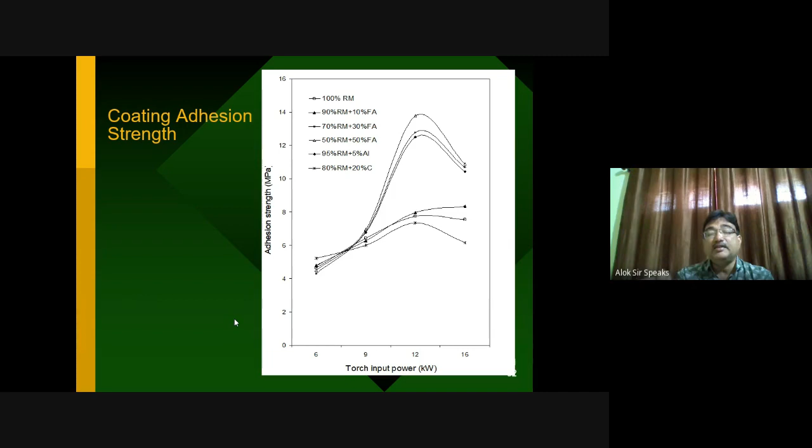The adhesion strength is a measure of that. So we saw that as the torch input power is increased, they are monotonically increasing, but after reaching a maxima, there is a drooping of the curve. That occurs due to various reasons, like at high temperature the particles fly off, some particles get vaporized, all these things.

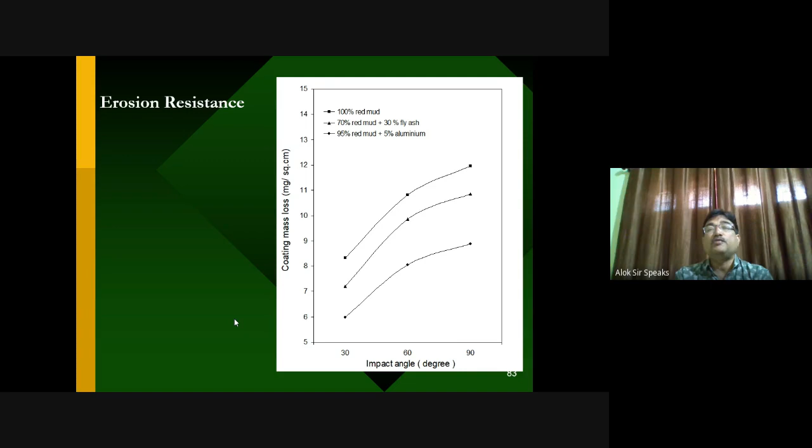Then erosion resistance. Erosion is a particular wear mode which occurs in dusty environments and causes a lot of degradation to the component. So our purpose was to make erosion resistant coatings. Therefore, these coatings are subjected to an erosion test, and we found that the red mud coatings have fairly good erosion resistance and can be used for erosion resistance purposes.

But then even if it is very low here in this case of red mud and fly ash composite coatings, it is not very important for us because these materials are available free of cost. They are quite cheaper compared to the spray grade conventional powders. This is a comparative picture showing the coating erosion resistance, erosion rates with conventional material and our material.

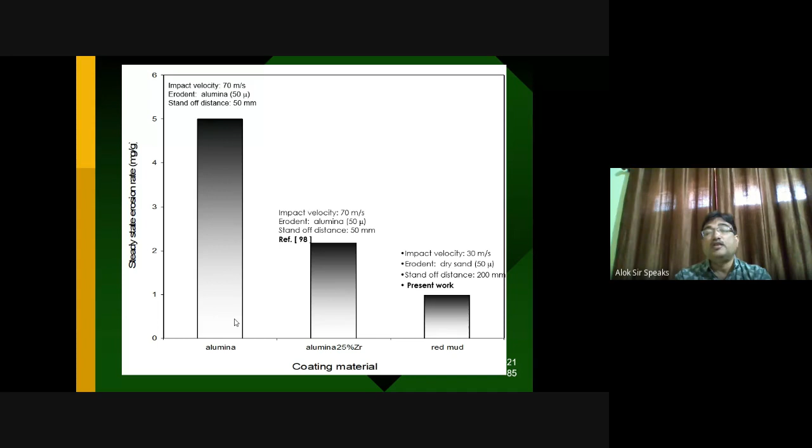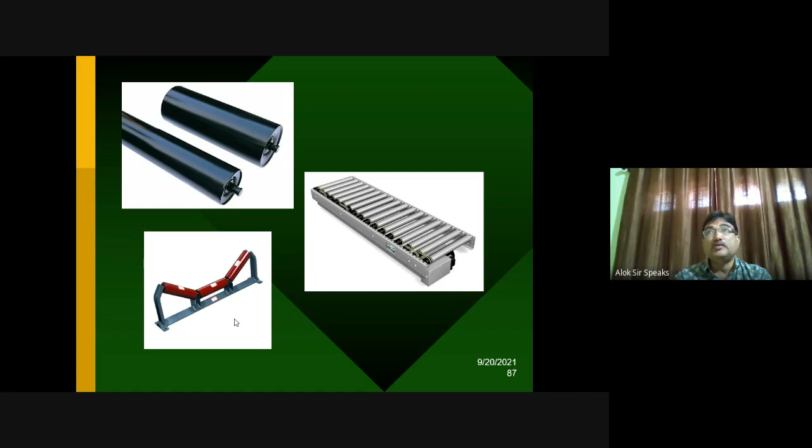So with good erosion resistance, these coatings can be used for agricultural implements, because agricultural implements do encounter slurry erosion at their workplaces. Then you can use them for coating the conveyor belt rollers, which are continuously encountering friction with the belt and the material that are loaded on the belts. It can be used for the coal bends used in power plants and furnaces where the pulverized coal is supplied to the furnace.

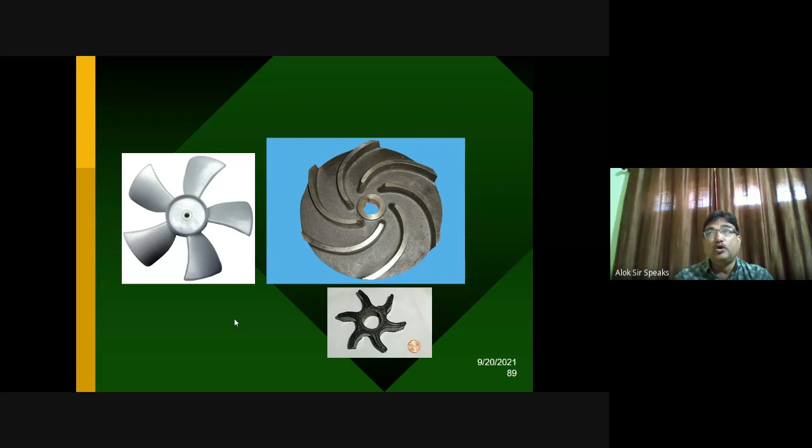Those pipes get eroded from inside because of the impact of the high velocity pulverized coal particles. So those bends and the inner surface of the pipes can be coated with this red mud. The exhaust fan blades can also be coated if they are subjected to erosion, particularly when they are used in deserts or in dusty mining sites.

So I told you about red mud, but there are many other industrial wastes, and in India we have no dearth of industrial waste. We see waste everywhere. So many of these industry wastes and construction wastes can be investigated, explored, tried for coating purpose. Plasma spraying is just one route. There can be other routes like flame spraying, high velocity oxyfuel spraying, detonation spraying.

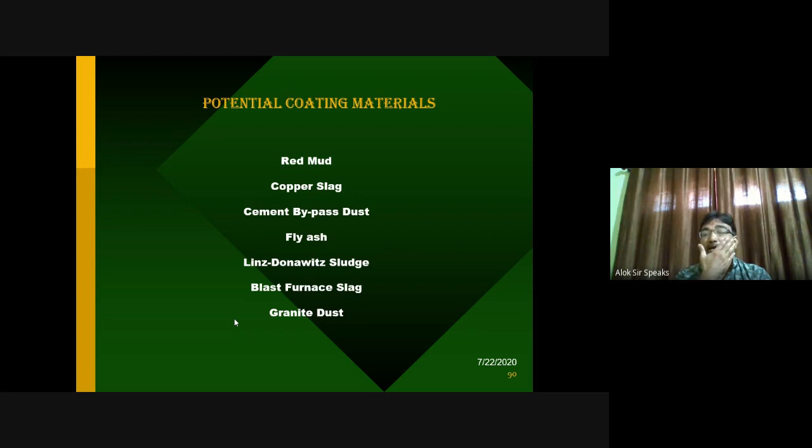So there are many ways these powders can be tried for making them good candidates for coating purpose. The list is long, but I have listed a few: red mud, copper slag, cement bypass dust, fly ash, LD sludge, blast furnace slag, granite dust. Out of this, we have tried red mud, copper slag, fly ash, LD sludge, LD slag, and right now we are doing marble dust.

So before I conclude, I would like to show you a video that gives an illustration of how the plasma spraying technique is accomplished, and this is the automated plasma spray technique existing in IMMT Bhubaneswar. This picture was taken there, and the credit goes to Dr. Sisir Mantri, who was having this machine.

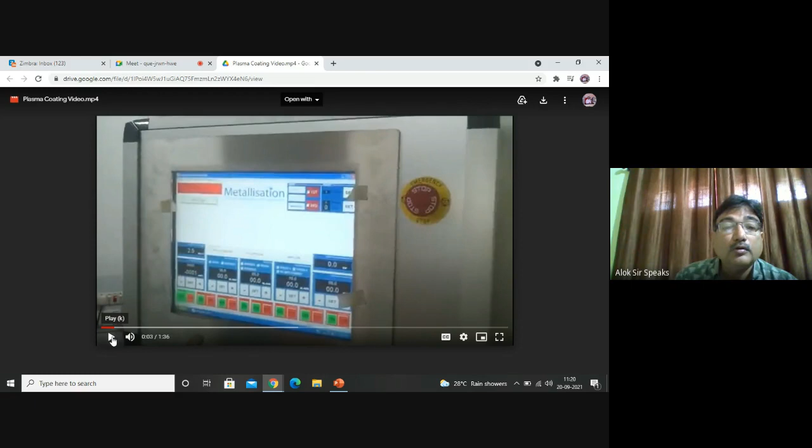Just tell me, can you see the video? Yes, sir.

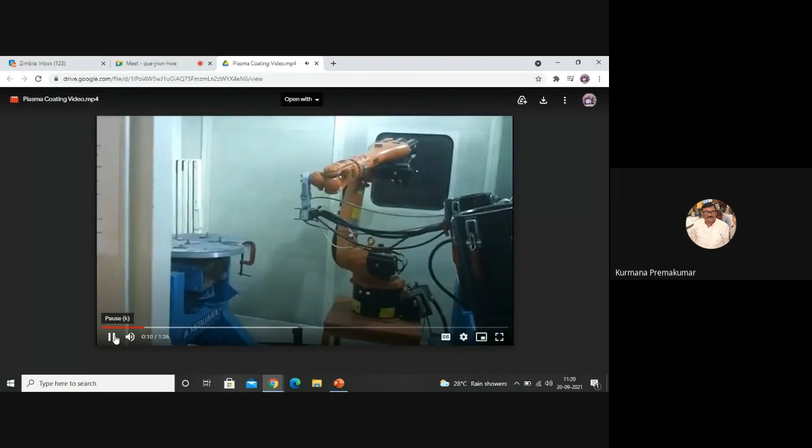This is showing the generation of plasma at the nozzle tip, and this is a target surface.